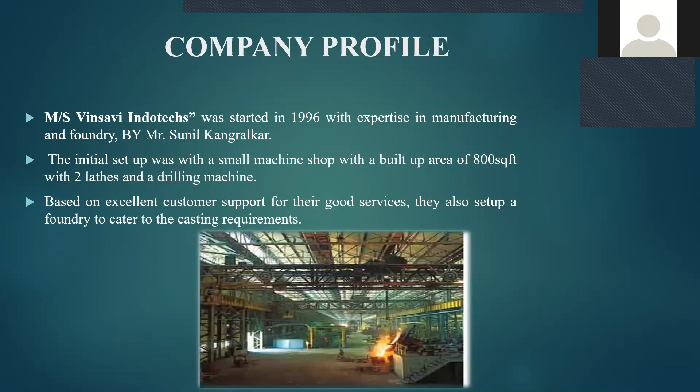Then I come to the layout of our foundry. For the main, we have an office where all the records and overall handling is done. Then we come to a test lab where the sand and overall material are checked with the help of a spectrometer. Then we come to the core making process, where they check what kind of sand they're going to use for making the core.

Then coming to sand preparation, where how much binder they have to add is decided. Then the shot blast furnace and heat treatment zone, where they remove the risers and gates. Then we have a grinding shop where excess metal is removed from the casting and they give a good surface finish. Then lastly, we come across the sand storage, where they prepare the sand, what all they have to mix and what is needed for the manufacturing process.

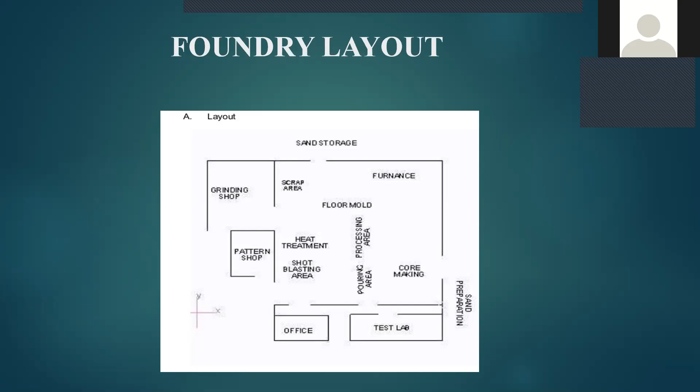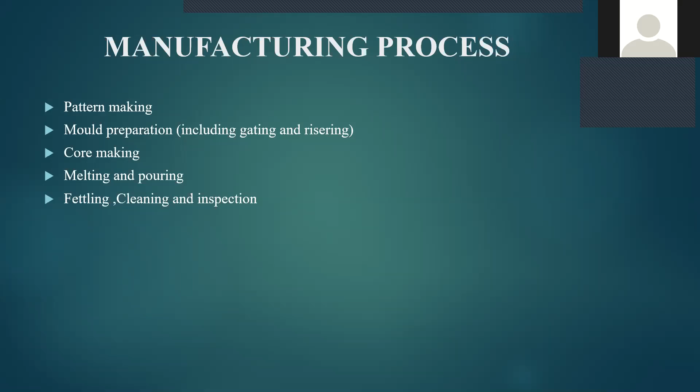Then for the manufacturing process, these are the five steps which will be important for us. We have to make a pattern, then the mold preparation. Then we are going to need some core making also. Then how we are going to melt the metal and pour it inside the mold. Then fettling and inspection.

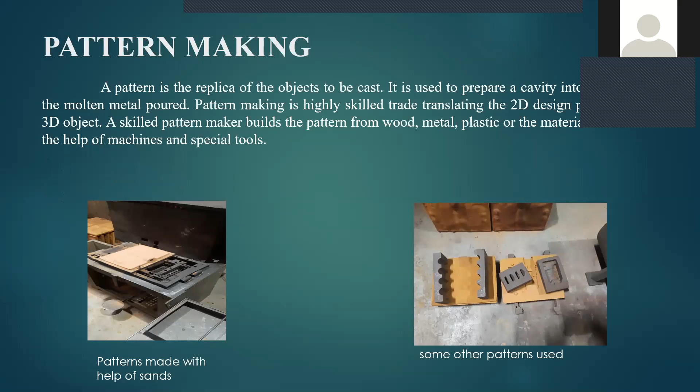And then for pattern making, a pattern is nothing but a replica of an object to be casted. It is used to prepare a cavity inside of which molten metal is poured. It needs high skill to make a pattern, and materials used are wood, metal, plastic. These are some of the images showing how the patterns are made.

Then coming to the mold. Mold is nothing but a cavity created using a metal refractory grains. The shape of the cavity corresponds to the shape of the casting. And mold is referred to as a negative replica of a casting.

To prepare a mold, we add sodium silicate as a binder, and according to the total weight of sand we are going to use, we only add 3 to 5% of sodium silicate. Then the rest of the process is like we did in our engineering workshop: you have to ram the sand. We keep the pattern inside it and ram it properly till it is accurately packed. Then we pass CO2 gas so the binder and the sand attach properly and it becomes harder.

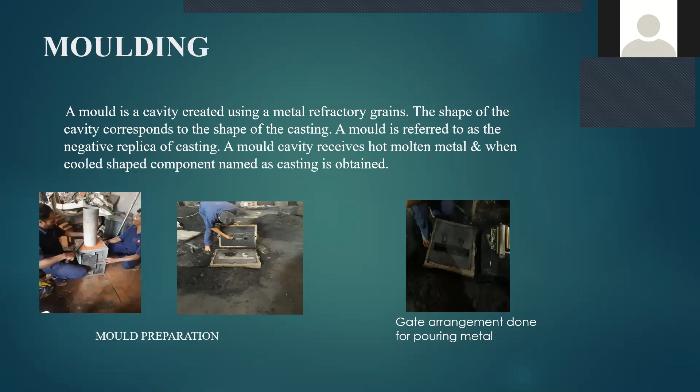Then our next part is a core. A core is mostly used in our casting and molding process to produce internal cavities. And a core is normally a disposable item which gets destroyed while removing it out of the piece. For choosing what kind of core we are going to make, there are some steps involved.

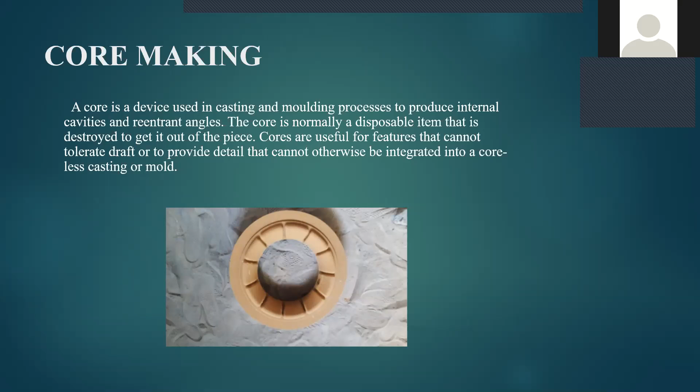At the start, a specific core sand is chosen depending on the complexity and the type of casting. Secondly, cores are tightened by rods and wires to avoid sagging and breaking. Sometimes due to shaking, the core might get damaged. For that, we insert some rods. Thirdly, after a core has been made, we heat it to make it harden. Then after that, we check for surface defects.

Then for melting and pouring, after the core and mold are ready, the next step is to deal with a furnace. Basically, furnaces are used to melt cast iron.

In Vinsavi, they were using a coreless type induction furnace, and the materials they were using inside to melt to form metal are pig iron, iron scrap and steel scrap. They are used inside a furnace to melt. Each melting batch had around 3 kg. After melting, the molten iron was poured inside a mold cavity through a pouring basin, and it was allowed to cool for about 10 hours.

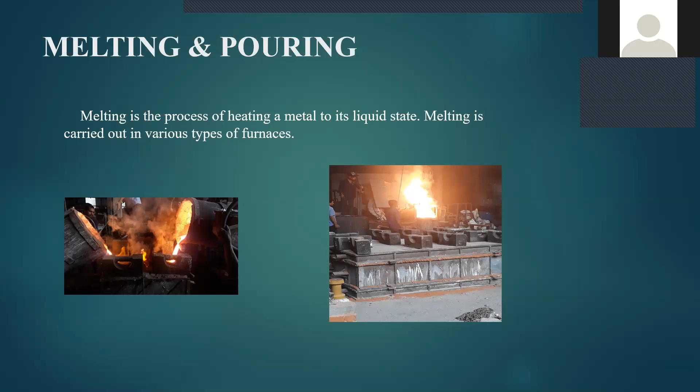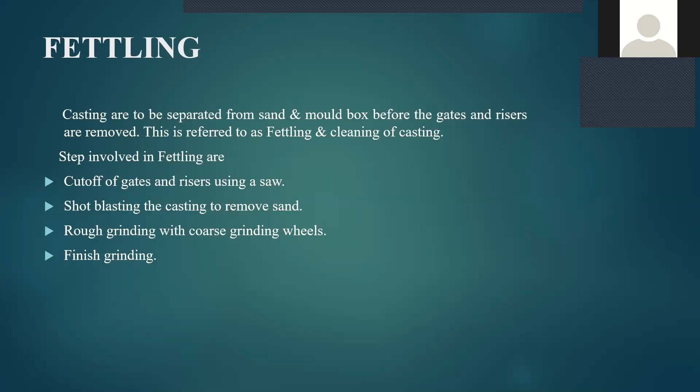Then fettling. In fettling, the casting has to be separated from the sand and the mold box. Then before cleaning and grinding, we have to remove the risers and gates. After we remove that, we have to remove the sand through a shot blasting machine. Then rough grinding is done by a grinding wheel. Then finishing is done. Grinding is nothing but giving a good surface finish to a casting with the help of a grinding wheel.

Then for inspection, after cleaning of the casting, the quality of the casting is checked. We mostly check the surface and internal conditions. For visual inspection, we check the surface finish, and magnetic particle inspection is used to find any defects inside the casting. Ultrasonic also finds the defects. Then dye penetration is used to see if there are any cracks inside it.

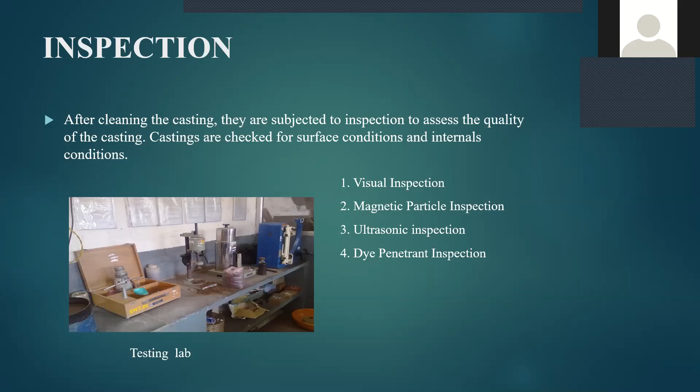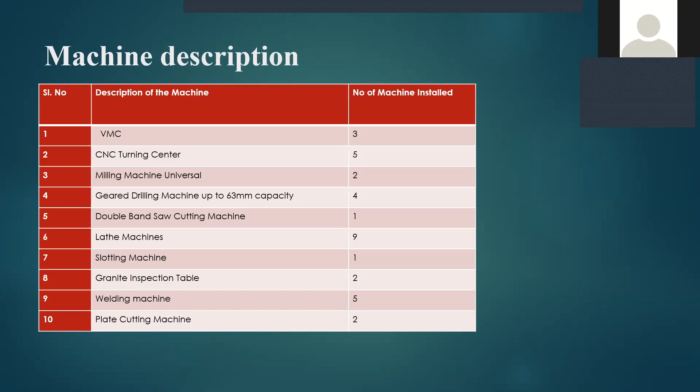As for the knowledge I have gained, I have gained practical knowledge about the engineering process. The visit to the company has given me clear ideas about foundry and how the workload is at industry scale or large scale. It has even shown me the path to improve the process by applying modern technology.

Coming to the conclusion, it was a good learning experience for me while doing my internship at EMS Winserve in Udamba. The company guide, HR, and other staff were organized and very cooperative, and they supported me by providing necessary information and guidance. I also learned in depth about the machines and foundry machines. In the industry, managerial and teamwork skills are gained by experience. It is disciplined and systematic work.